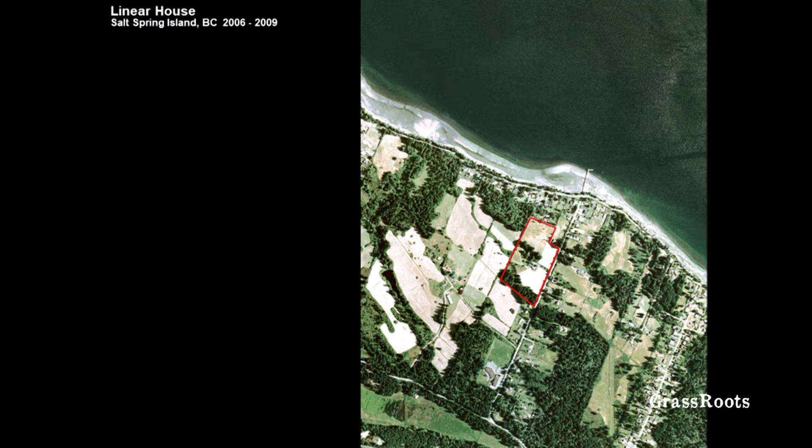And this project is located on what is called a farm. It's really not a farm. It's just a large property that has some hay growing on it, so it can qualify for some tax benefits. But it's on a farm. And this is the situation of the property before we began.

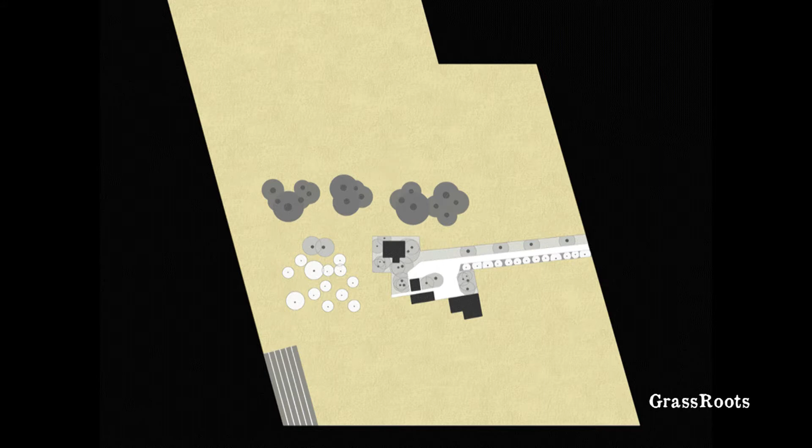And we had a house, and there's a studio, and a utility building, and a barn. And then an existing row of mature Douglas fir trees, and then a cultural landscape of fruit trees. This farm was established by some German immigrants who lived there for many years, and our clients purchased it when they retired.

And so the first thing that we did was we decided to remove the house, the small structure, and what we actually did was sold it to some neighbors who moved it and simply relocated it down the road. And then within that, we inserted a linear house. We call this the linear house, and it's called the linear house for good reason, because it's 300 feet long and 16 feet wide. Anything that's long has a huge advantage proportionally. There's lots and lots of things that develop as a consequence of that.

And so here you see that this long, 300-foot long bar of building has a division in the middle, which is a breezeway, which divides it into a principal house and a guest house. And then the cultural landscape was reinforced with trees and vegetables, because the people who bought the property, our clients, were phenomenal chefs and very, very interested in food. In fact, they have 4 different types of ovens in their kitchen so that they can do all the things that they want to do. And so that is the strategy for the house.

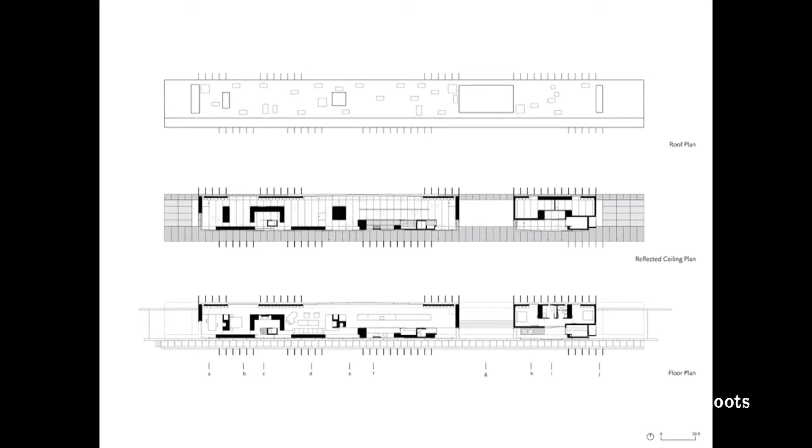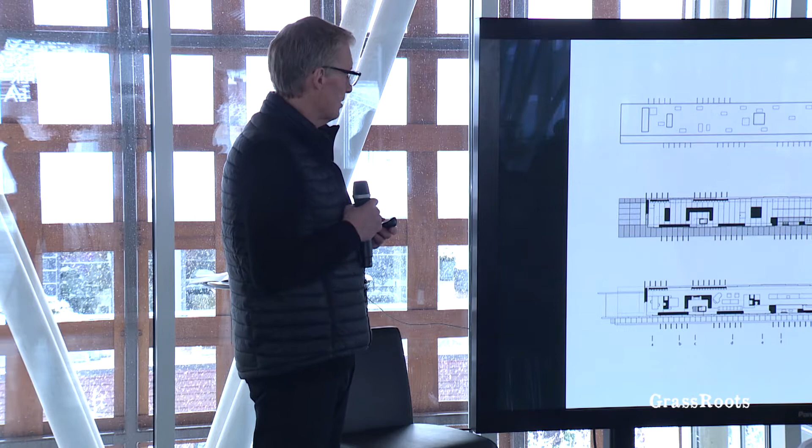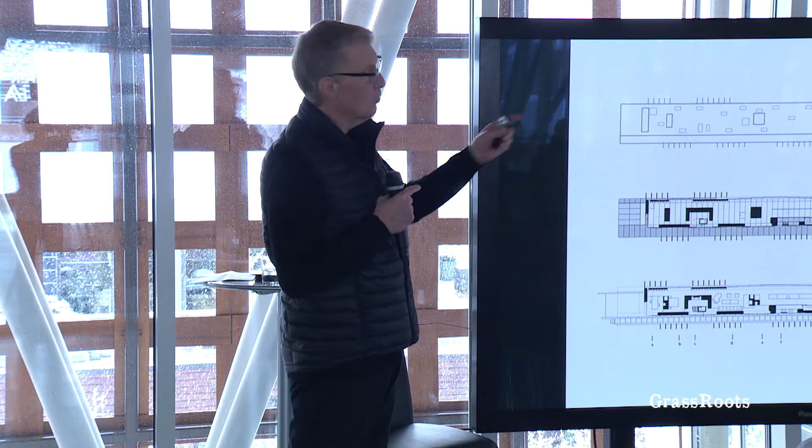And so this is the floor plan of the house, and you can see it's really just a line of rooms, one on the other, connected by a walkway which runs along the south side of the house. And maybe one of the most unusual things, aside from the fact that the rooms are 16 feet wide and the house is 300 feet long, is that we have over 40 skylights in the roof of the house, but I think there are only 4 that shine into the interior of the house. The remaining 36 skylights shine into the roof assembly, and I'll explain what that does in a moment.

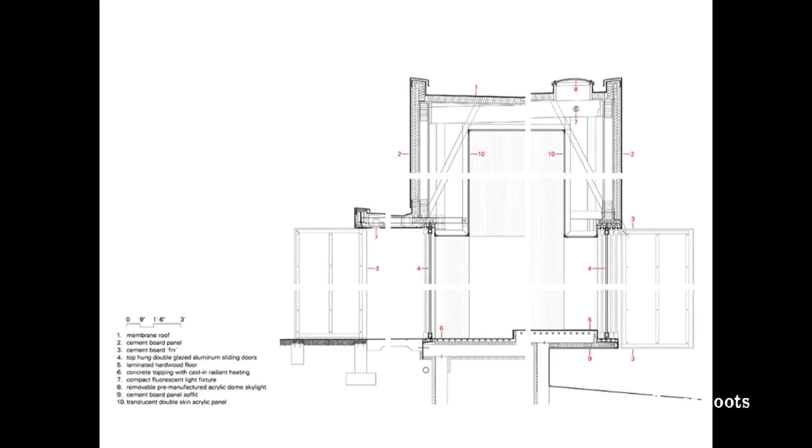And so here is a building section, and for those of you who can read architectural drawings, what you can see is there is an interior envelope and a structure and a skylight that doesn't project through, and this is representative of those skylights that are not shining into the interior. They're shining into the building envelope. And what that does is it allows us, because the interior surface of the building is translucent plastic. So when you see the images, you might think that this is a white painted drywall interior. It's not. It's an extruded plastic sheet which allows the light from all these skylights to shine into the house, and then at night those lights are replaced by artificial illumination in the same spot.

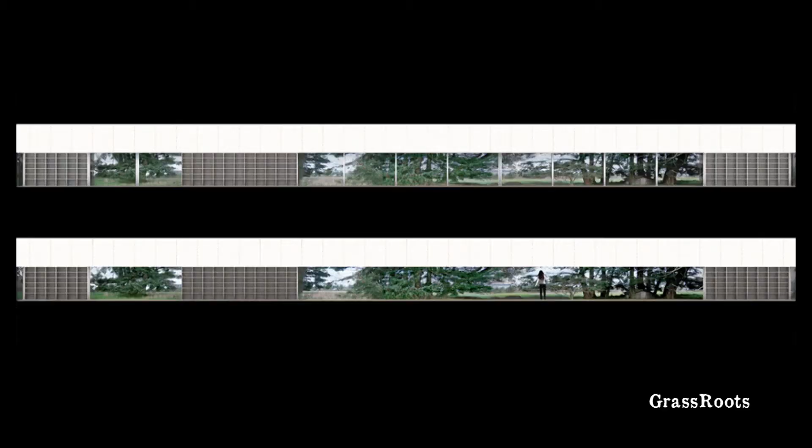Further, the long length of the house has retractable walls, like these walls in the gallery here. We have an 80-foot long wall which retracts fully, so the upper drawing shows the glazing units, and the lower ones show it open, and on top of that, it's a wood structure. And so the 80-foot span is a wood span, which is made using a composite structure of plywood and glulam beams. And so here you get the result of that.

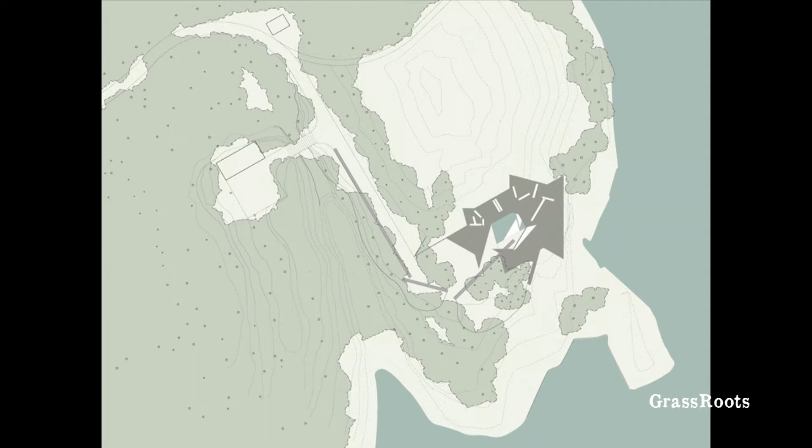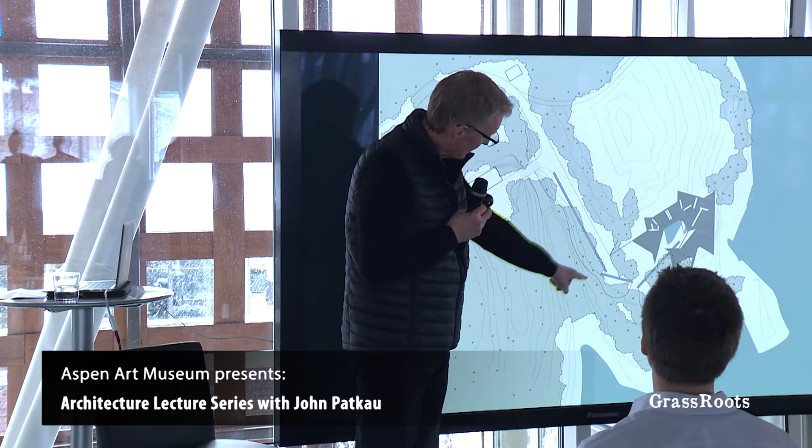And it's a very complex site. We call the house the 5-site house because there are so many different characteristics. There's the Douglas fir forest mixed with big leaf maples, which go a beautiful luminous yellow in the fall. There's a tidal basin on the south of the house. There's the open water, which is quite violent, has significant storms to the east.

There's a really bare mound of rock, as well as the last landscape, which is the beach below the house, which is subject to these tremendous storms, and so there are logs and all sorts of flotsam and jetsam that have been deposited on there in a very sort of changing and dynamic pattern. So obviously you have the great view and you take advantage of that. But for us, the beach below was in some ways the inspiration for the house. And we decided to make the plan form of the building complex in its geometry, as a reflection of this beach.

And so the house begins with the site, with some stone walls which we constructed to protect the approach to the house from a very steeply sloping cliff-like condition. Then we introduced reinforced concrete walls which start to define the primary space. And then all the secondary spaces that sort of are the eddies around the flow of that primary space are developed into bedrooms and kitchen and service rooms.

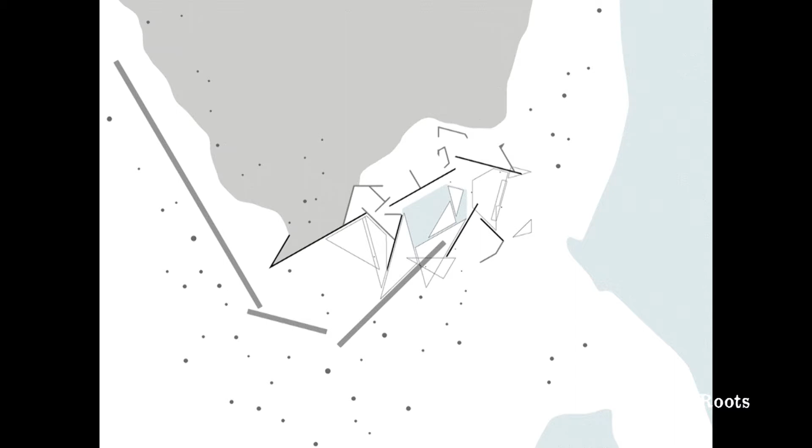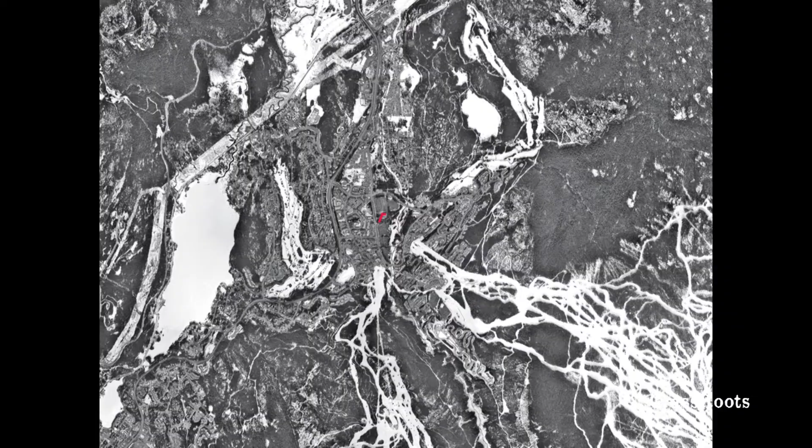So there is a huge diversity of art that all comes from British Columbia, which is what this museum is dedicated to. The parts of Michael's collection which are not from British Columbia are not in this gallery. It's strictly his British Columbia collection. When he was looking for the site, he wanted a site which had trees. He said it was really important to him, and I'm really pleased that he had that point of view, because he ultimately settled on this site in Whistler, and you can see the ski slopes coming down to the Whistler Village, and his site is just off of the Whistler Village, which you see here.

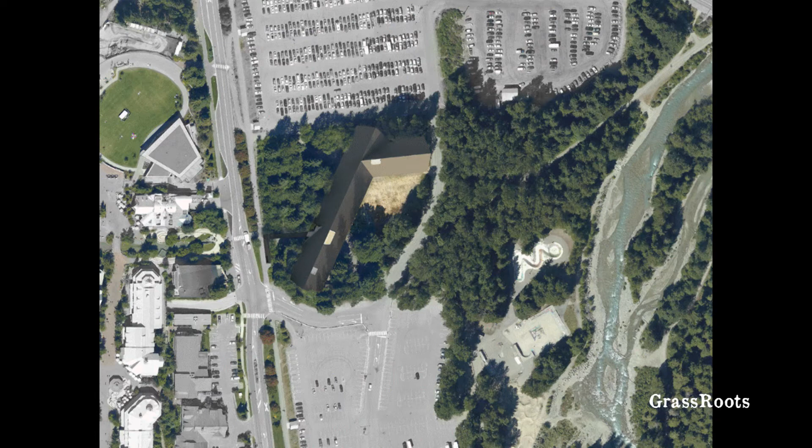The site was donated by the municipality of Whistler. It was a former municipal works yard. If they were hauling a car away, they would store it on this site. If they were storing a pile of gravel or equipment or various things, this site was the catch-all for everything the municipality was doing. Fortunately, they were doing this all on the ground plane, and they left the trees on that site in place. And so when Michael saw the site, he chose it among the sites he was considering because of those trees.

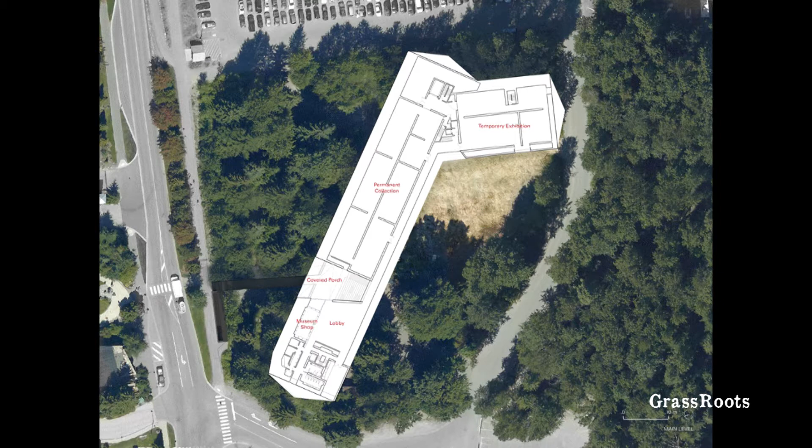And I think that was both an important personal decision and a very important decision for the art on exhibit, the permanent collection, because the art from British Columbia has a long tradition of being tied to landscape. We have all the First Nations art, but also artists like Emily Carr and E.J. Hughes and many artists until the present day who have been focused on the landscape. Putting the building within the landscape was central to our concept, which was to open the building to the landscape. The curators insisted there would be no natural light within the galleries because it was a permanent collection for the long term, and they didn't want to deal with the impact of ultraviolet.

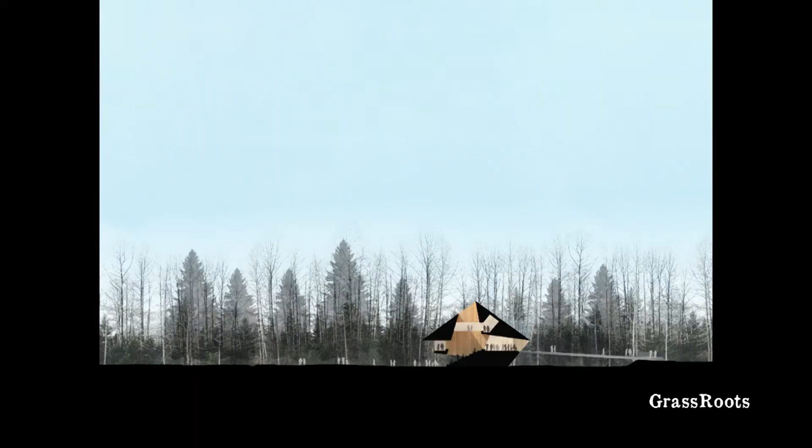And so the building is organized into lobby, entry, porch, permanent collection, and then temporary exhibition at the far end. The temporary exhibitions obviously are very diverse in their character. But what this allowed us to do was to organize the building so that when visiting the permanent collection, even though we didn't have any connection to natural view and light within the gallery space, it was very easy to step out into the principal circulation system of the building, to be in contact with the forest and meadow that we created on the site.

And so here you see the building in cross-section. You approach the building from a high point on a bridge, and the building is located in a floodplain. We were required to elevate the building above the 1 in 2,500 year flood, which I guess is playing it safe, and have very little on the ground. So we just have a few piers that come down, I think about every 70 feet. There's a touchdown point, and it's really a bridge that we've constructed for the museum above.

This is really a dike which protects Whistler Village from the floods, and so we're building out beyond the protected area into the floodplain because that's where the trees were. Further, because of the enormous amounts of snow that Whistler gets, about 15 feet of accumulated snow over the winter, the roof is very strongly pitched to shed that snow. And so here you see the building in cross-section.

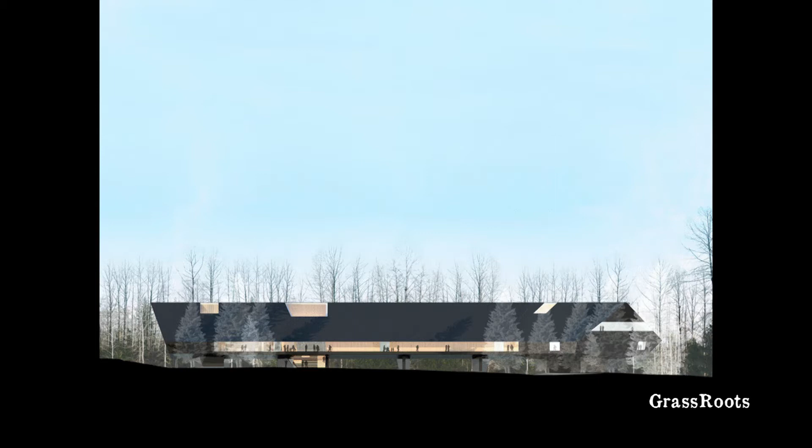And so here you see a view from the meadow. The museum is a dark color for exactly the same reason that the houses were a dark color, so that from the village it disappears. When you're looking at the museum, all you see is the trees that surround the museum, with the exception of a few moments. And one of those moments is the walkway that connects all of the spaces on the main level, which you see, which is wood-clad.

And then the other is the entrance. And here you see at the end of the bridge that the entrance portal, which is an outdoor porch, which allows you to walk through the building and then down to the meadow beyond, as well as entering the building, is also a wood-clad space.

And so here now you're leaving Whistler Village proper, you're crossing the bridge which rises to the museum. The aperture for the entrance to the museum, as well as the connection down to the ground plane below, is lined with hemlock, which is a common species in this region. And then from below, there is a large amphitheater-like stair which connects you from the porch down and from the ground plane below up to the entrance of the building.

And so here you can see that areas that are protected as well as visible are clad with wood, whereas the remaining part of the building is clad with this dark material so that it basically disappears. And here you can see how the building is literally spanning across the site to allow the flood to race through the site whenever that 1 in 2,500 year event occurs.

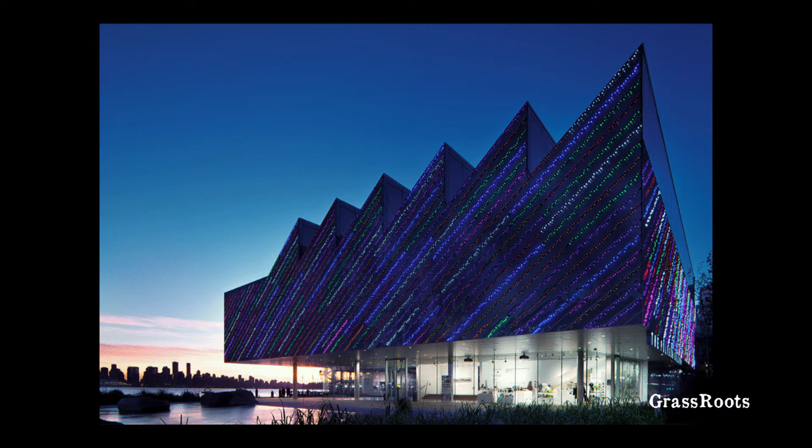And this last holiday season, an artist was commissioned to light the building. And so what you see here are simple Christmas tree lights, but because the background of the wall is a mirrored stainless steel panel, everything gets multiplied many times, and so it really takes on a tremendously animated character.

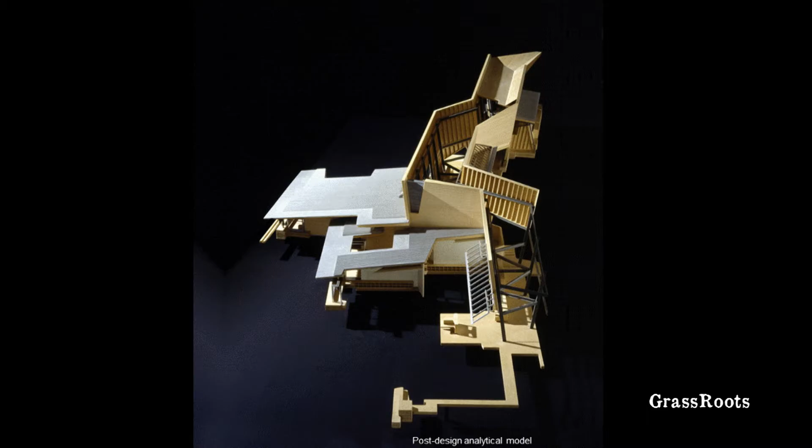Okay, so the other half, research projects, and this is really something quite different. This is a building from the mid-90s, a school, and this is a model that we made of that school, which is a fragmentary model. We have always done research, and in the old days, it used to be this kind of formal research. Architects all do research, obviously, because we're designing things, but we always did other kinds of research as well. And so this was part of a large body of work that we did of sculptural models.

But about a decade ago, we decided to change course, and this is the book that Rich mentioned, Material Operations. We decided that we would focus on a very direct idea of taking different materials and applying a force to those materials and deforming the material in some way that would turn it into a structural material and a spatial material. And so it began, and there's a number of projects since this, but you can see that there are about a dozen projects here.

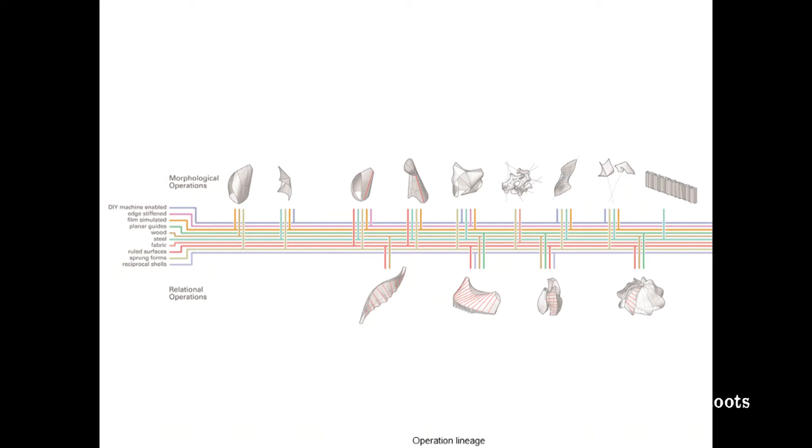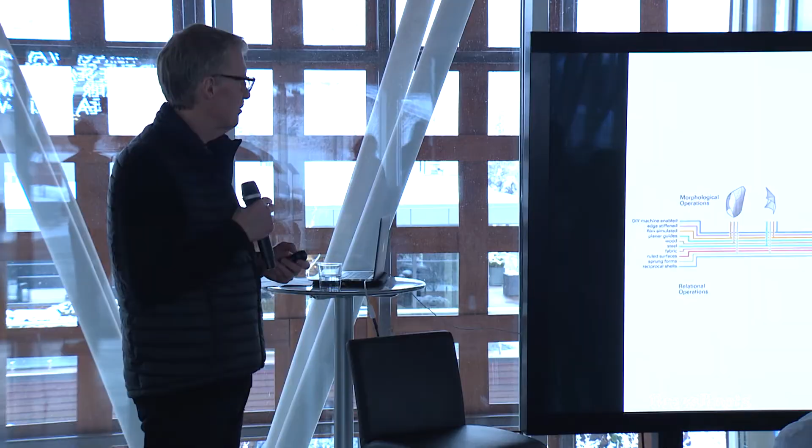They take form of, there are wood projects, there are steel projects, there are fabric projects, all sorts of projects which take on different kinds of character. And it began with this project, which is called the Skating Shelters, which was a temporary installation on a frozen river in my hometown of Winnipeg.

And we were invited to construct some temporary structures to protect... it gets to be 40 below for significant periods of time here. And when you're skating on the river at 40 below, it's nice to get out of the wind once in a while. Winnipeg is considered to be the windiest place in Canada.

And so what we did was we began to try and understand what we would do to construct these temporary shelters on the river. They had to be very light, they had to be materially efficient. And so we looked at a few things. We took a sheet of plastic and we put an elastic band around it, and just the force that the elastic band puts on the sheet of plastic curves it, and as a consequence of being curved, it stands by itself and it protects you. It has an interior.

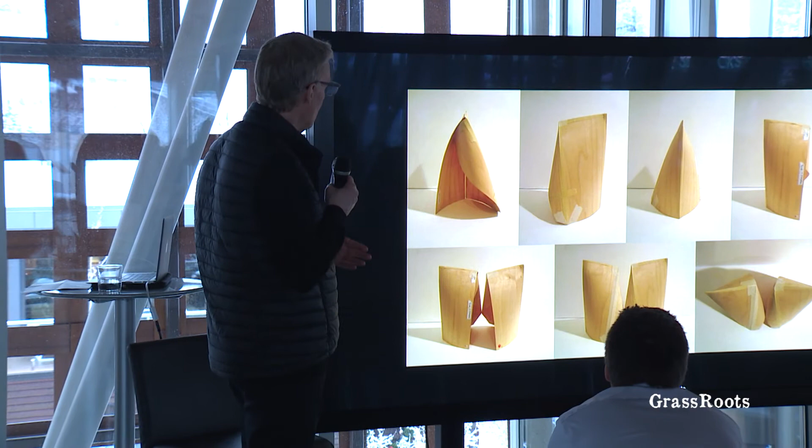Well, we then went and bought some thin plywood. We've got a big workshop in our office. We do lots of making. And we tried to make that thing out of the thin plywood, and it didn't work. We were shocked. We thought the wood veneer would be the clue, and we realized after the fact that wood veneer is fundamentally different than plywood.

Plywood is what's called an isotropic material, in the sense that it has plies going in both directions. It behaves in a similar way whether you bend it one way or the other. It resists bending in both directions. Veneer is anisotropic. Wood has a grain and it has an orientation. And in one direction it's very strong, and the other direction is quite flexible. And so the veneer was behaving in a way that was quite different than the plywood.

And so we were stumped. The plywood was not going to get us where we needed to go. Not only that, we couldn't get sheets big enough that you could actually get into. And so we looked around and we found a material called bendy ply. And bendy ply is a 3-ply thin sheet of wood which has a thin central veneer and 2 plies of heavier veneer, which are both in the same direction. And so it's very strong in one direction and very flexible in the other direction.

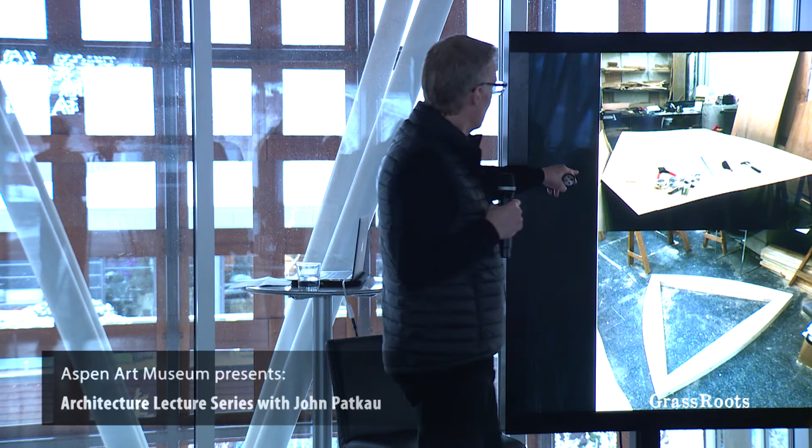And we then layered these sheets of bendy ply one on the other to aggregate a bigger sheet. And so here you can see 3 sheets of bendy ply that have been attached to one another, and the beginning idea of a platform and a spine. And here we go making it in our shop. And you can see that the bendy ply is very, very similar to the wood veneer because it is anisotropic, not isotropic. And so there were some surprises.

So when we really, really cranked, the bendy ply would break. And so we cut a slot and an eye out of it to relieve the strain at that point. And at the point where these 2 sheets came together, they actually collapsed on one another. So we simply, in our modeling, we took a scissor and just cut it off. And here we just cut it off, and it springs into this natural sort of ellipsis.

And what this is, and this is really an important concept, this is what I would call a sprung form. The curvature of the material is not something that we impose. The curvature of the material is the shape the material adopts as a consequence of what we're doing to it, and in this case, attaching it to a platform. And so here you see the interior. Where there's only a single layer of bendy ply, we perforated the surface to bring more animation into the interior. And you can see even where we go to these different layers, the base acknowledges that difference.

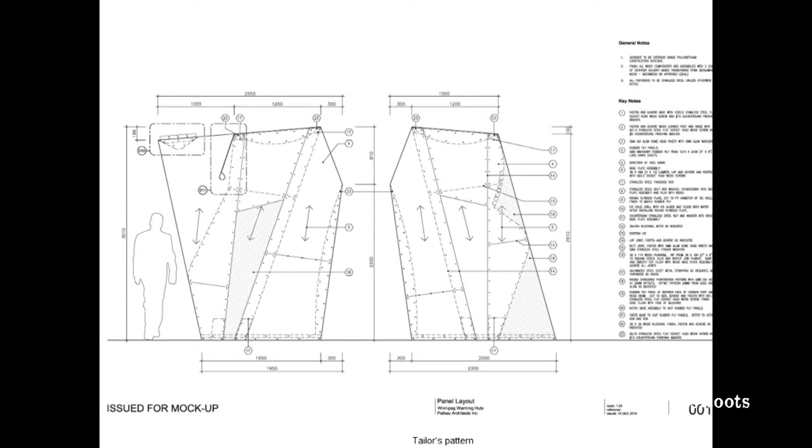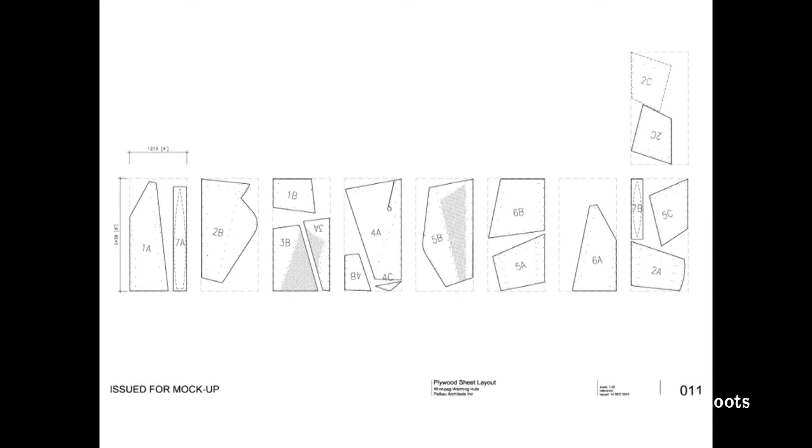We just made patterns for all of the components, and we sent those patterns to Winnipeg, which is 2,000 miles away from Vancouver, and they made the things out of the patterns there. And at the same time, we started working back in model form with the wood veneer to understand how the different pieces would relate to one another, because we had a modest budget, but it allowed us to make 6 of these things. And so we worked hard to find the arrangement for the 6, which you see here.

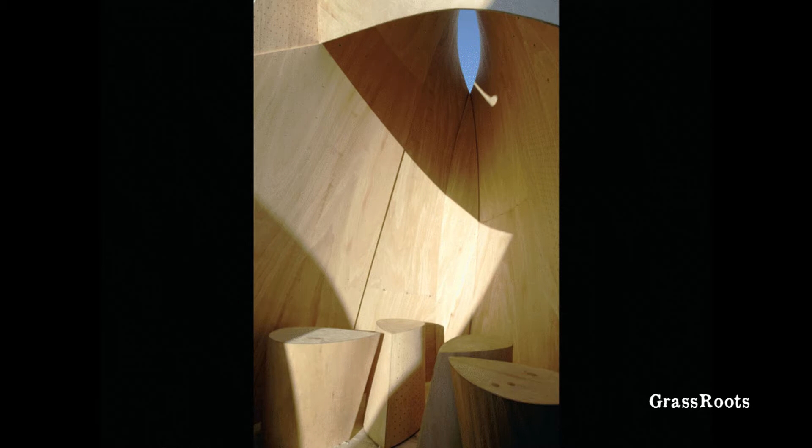And so intrepid souls in Winnipeg at 30 below zero, skating along the river. There weren't many, I got to tell you. And here you see these forms, which are simply the curvature and shape that comes out of restraining the base and fixing the joint. And all of these forms just spring naturally. There is nothing predetermined about these shapes. They're entirely the will of the material. And then this is the interior. Even the benches that we made for people to sit on, the little stools, are made in the same way.

So while that project was underway, I was teaching a studio at Yale University, and the notion was that we would build a workspace for young people who were not particularly gifted academically, but had great sort of hand skills. We would make a workshop for those people, really talented maker people. And we went to the Eli Whitney Museum and Workshop in Hamden, Connecticut, which was the theoretical site of our studio.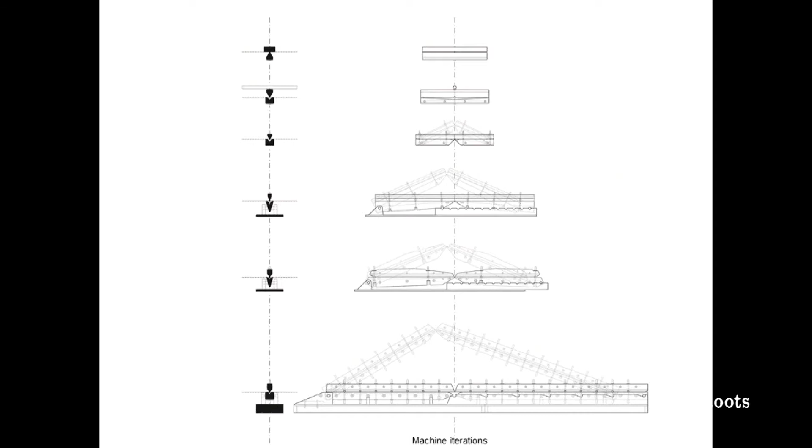And we began to invent a machine, and we ultimately made 6 machines, and this took us 4 months over the summer. We started with the top machine, and we ended up with the bottom machine, and they are incrementally bigger and more refined and more powerful. They're basically wood and steel constructions which are designed to break a piece of steel, to fold a piece of steel like a press brake would do in a steel shop, but also to bend it across the fold at the same time, which is impossible.

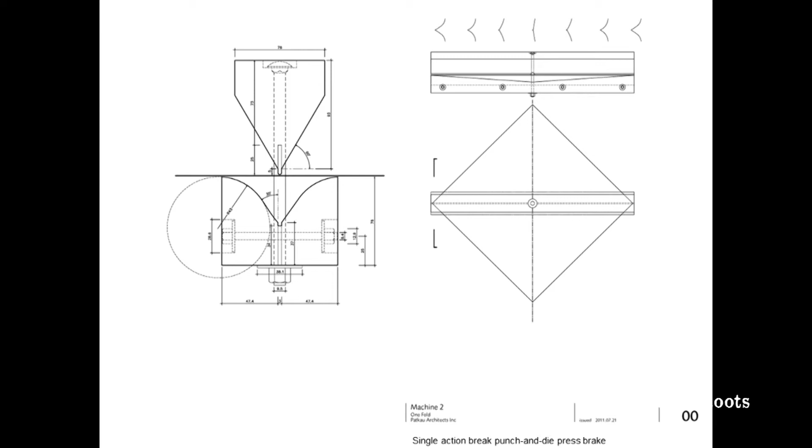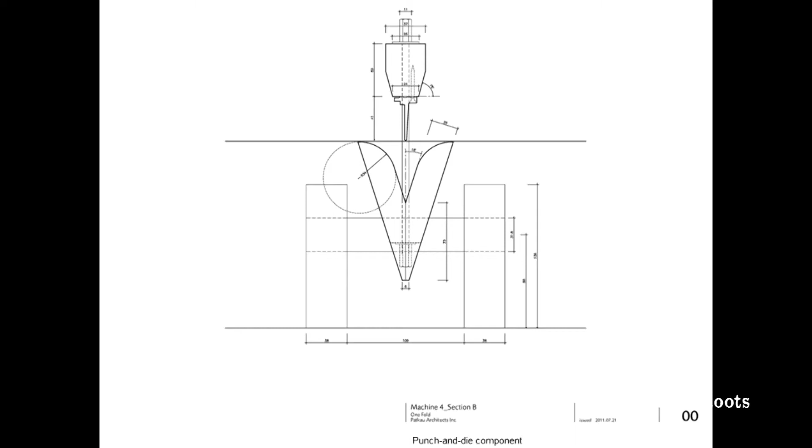And so this is what the machine started out looking like, and we made a crease in one side and tried to force the steel to do that, and we got some success, but not much. We began to figure out different ways of doing it, and we quickly came to the notion that the brake had to have a joint in the middle, and the joint in the middle would allow us to bend it. And what we learned was, if you bend it and fold it simultaneously, not sequentially, you can make it go both ways. And so, using thicker and bigger sheets with bigger and bigger machines, we finally got to number 5.

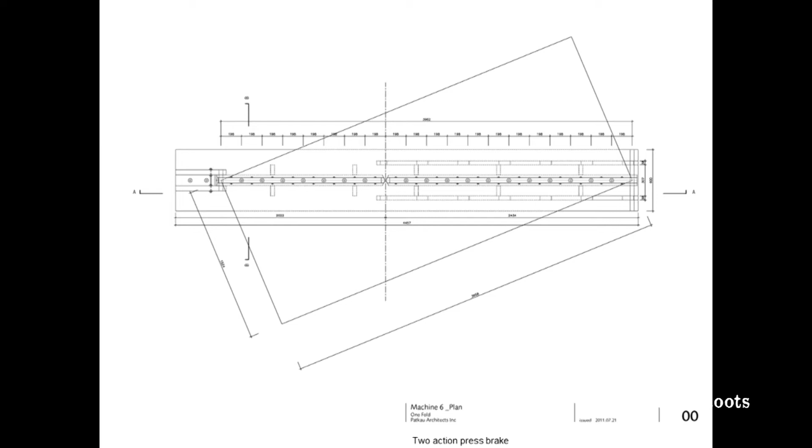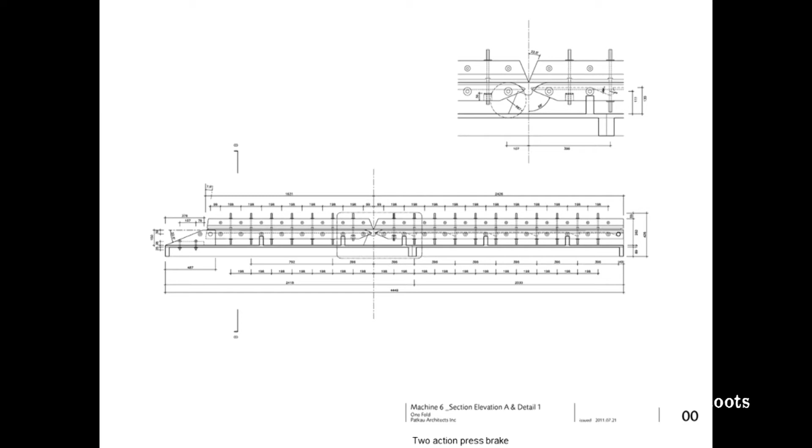Now number 6: this is the largest sheet of stainless steel we can get in Vancouver, which is 5 feet by 12 feet in dimension. And we made a machine that was big enough to break that piece. In order to put the force in, there are bolts that run along the entire length. So we drill holes on the diagonal of the sheet, put the sheet into the machine, and then start cranking the bolts together to force the machine to fold the steel. At the same time, we lift the machine in the middle to cause the form to bend.

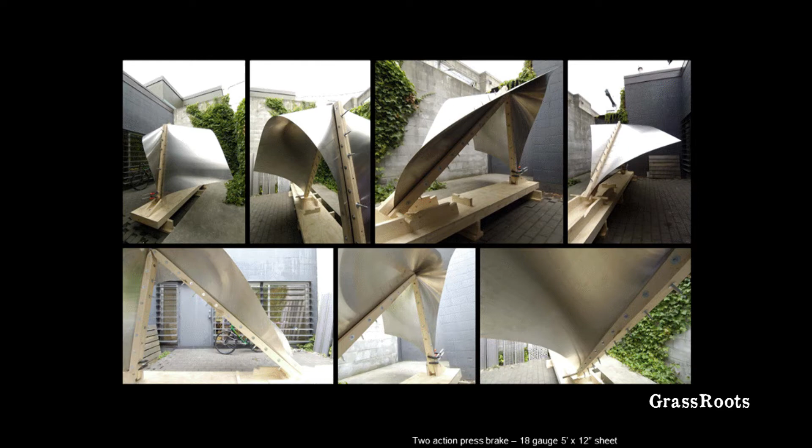And so here you see our courtyard. You can see the machine getting set up, starting over here and following down. You can see the sheet of steel being brought in. The machine is put together. We start cranking it. We start hoisting it. And here you can see, again, the machine and then the final product at the end. This is the sheet of steel still in the machine. And this is the sheet of steel in our courtyard.

And this is really interesting because it is a very robust structure, because the fold is inherently very strong and the arches are very strong. And those arches are extremely beautiful curves because they're not geometric. They're completely natural, sinuous curves that come out of the forces. It's just the resolution of forces moving their way to the edge of the sheet, which results in this shape.

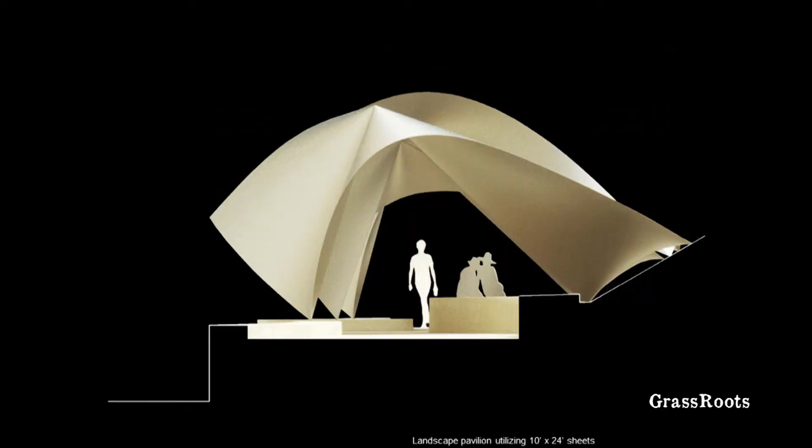And so this is a project which we're trying to convince somebody to build. It's only twice as big as what we made in our courtyard, and it forms this landscape element. While we were doing that, we got a call from Comme des Garçons in Tokyo.

5 minutes? No, it's going to be 15 minutes. Sorry. I'm going to buck the system here.

So we got a call from Rei Kawakubo, who is the designer from Comme des Garçons. She said she saw our skating shelters. She loved the skating shelters. She's doing a new shop in Ginza. She wants to have something that we would make for her in the Ginza shop, except it can't be combustible. It has to be non-combustible. We said, no worries, because we're working with stainless steel.

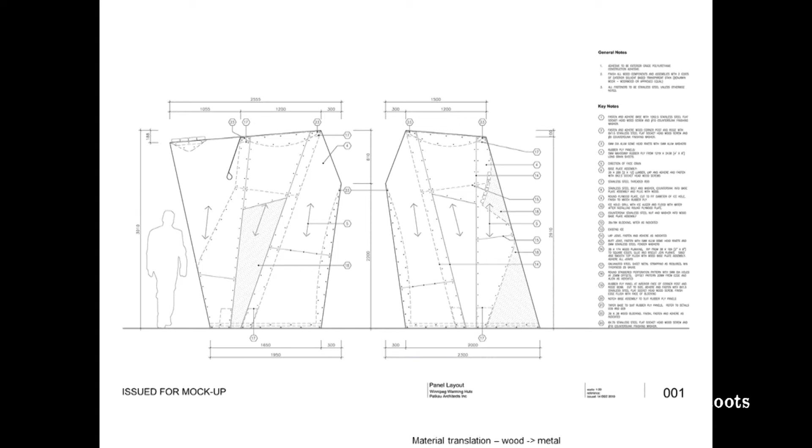And so we went back and we designed this version of stainless steel like the skating shelters. And we took all the lessons of the skating shelters in terms of patterns. And so we made this model out of plastic, it's only this big. Then we took it apart and we measured it. And these are the pieces that you can make that out of.

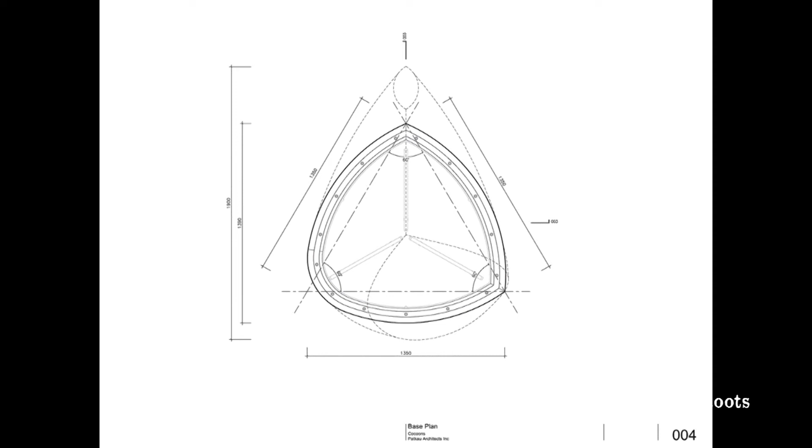And these are the folds. So these straight lines are where you fold it. And you can fold them and then join the folds, which is different than the way you would do it with the wood, because this is steel. And so this is the language of the parts, and I'm speeding up to try and meet my deadline. So here it's being fabricated in Vancouver.

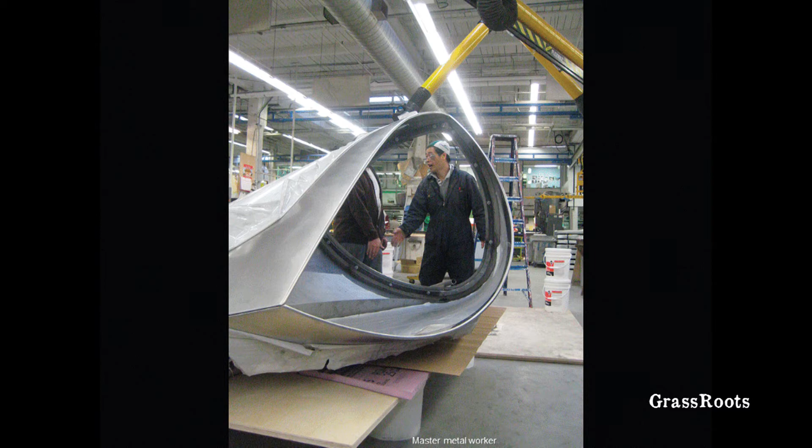Now, we have to build them in Vancouver. We have to crate them. We have to ship them to Japan. They can't use the elevator in the shop, which is on the 2nd floor, because it's somehow not allowed in their lease, and it's too big to go up the stair. We have to design it so you can break it down. So they unpacked it on the street in Ginza, broke it into pieces, took the pieces up and reassembled them.

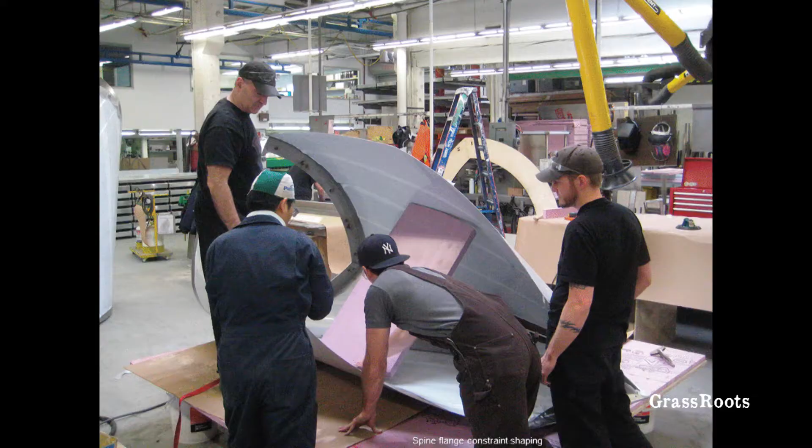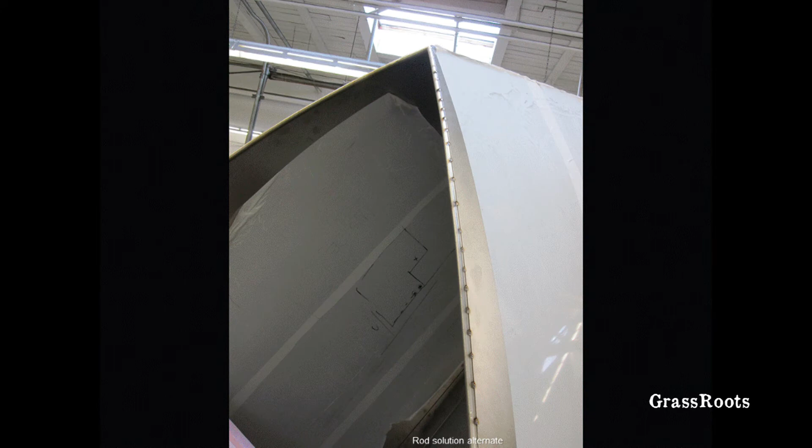So here we are making them in this stainless steel shop, the 2 of them. Interesting problems, which we never understood. We wanted to stiffen the edge, and the edge is quite sharp because it's a very thin sheet of steel. And so we couldn't use the plate that we had imagined, but we found that a rod could be easily attached to that edge because it travels on the circumference, and it gives you a very beautiful edge condition.

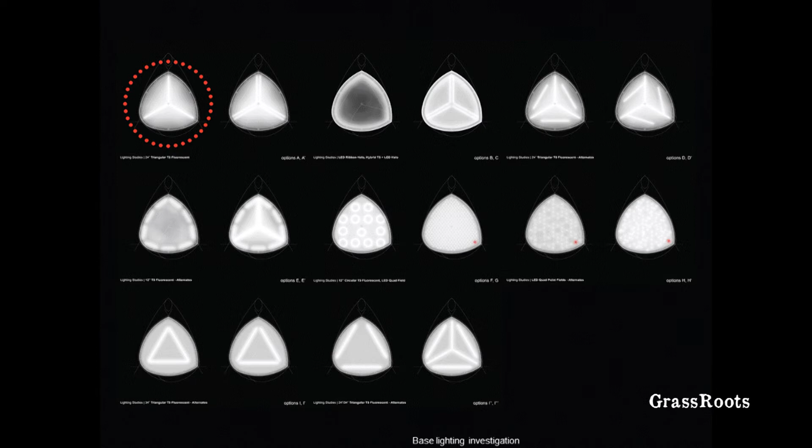We also had to invent a door because one was a change room, and so we built a version of it in wood in our shop and played with the door, and here it is. It's a fabric door with the light from inside, and the light inside is a luminous floor which has 3 fluorescent lights below it. And this is the final, we call them cocoons, shot through the aperture at the top, looking back down.

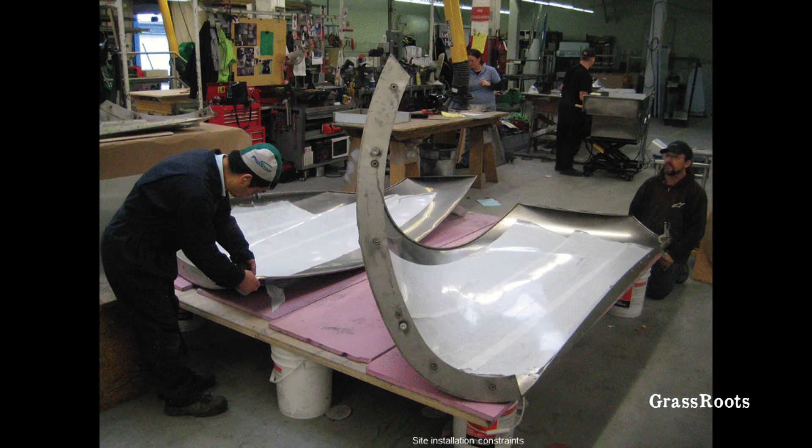And here you can see the pieces being disassembled and then reassembled, as they will be in Tokyo. The floor going in, and here is the final work in the shop floor in Vancouver, and here it is in Ginza.

So my mind never stops. So I was thinking, I really want to make ways to get these things to be really big. I want to make them big, but these are all working on sheets and bending sheets. And when you start wanting to be big, you can't get sheets that big. And so I came up with the idea, I noticed in the previous cocoon project that there was one point along the curving surface where you could put a straight edge, what we call a ruled surface.

And so here, I came up with the idea of developing a truss which would support curving guide rails onto which you'd put 2x6s. And those 2x6s would be moving slightly in relationship to one another so that then you could shotcrete the sides.

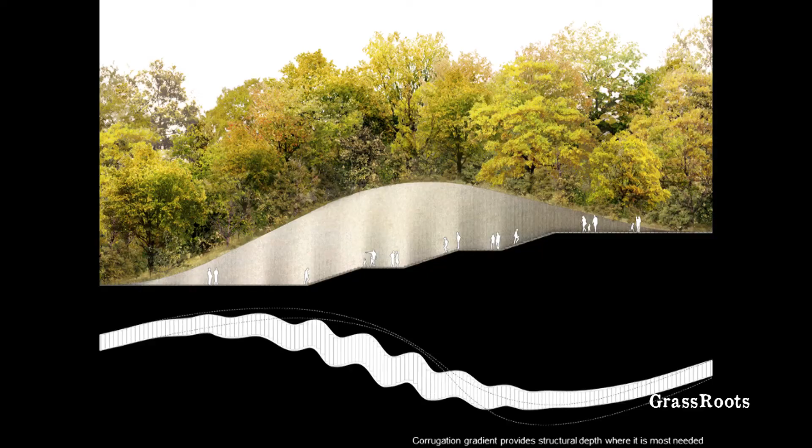And so here is the notion. It's a theoretical project. You're trying to get through some steep grade. You cut a slot in the grade. You construct a reinforced concrete retaining wall, which has a big amplitude curve at the top and small amplitude curves at the bottom to act like corrugations to increase the structural capacity of the form as the load increases at the bottom of the retaining wall.

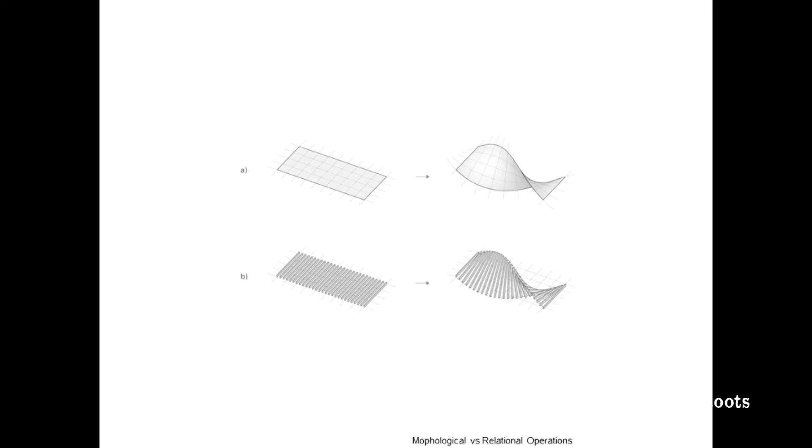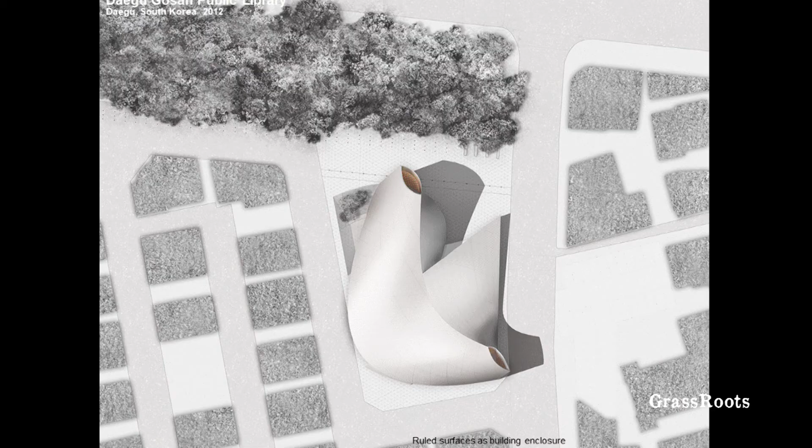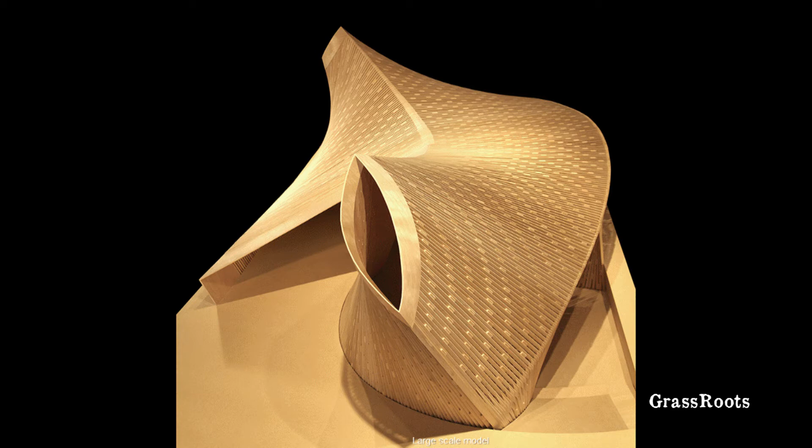And so here you see the outcome of that. You see that all these little tiny pieces of wood are tied together, form this large, really beautiful undulating surface, which has remarkable structural properties.

And so, I don't know why this is doing this, but it's really not behaving. It's not behaving at all. Uh-oh.

So what's happening is that all the pieces of wood are tied together, and then there's a skin, a shotcrete skin, which is put on them to act as a diaphragm.

And then, oh yeah, keep on, that's great. Keep on going. Further. Oh, great, great, great. No, keep going, keep going. Here we are, right here. Perfect.

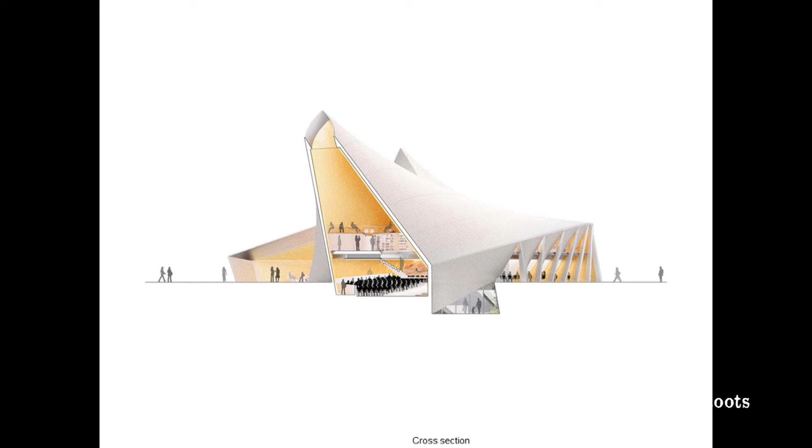So here are those forms that come out of simply putting 14-foot pieces of timber together. It's very much like a woven basket. And you can see that all the pieces are straight. So when you do a building section through on one axis, all of the cuts are vertical. And when you do a building section in the opposite direction, all of the cuts are curvilinear.

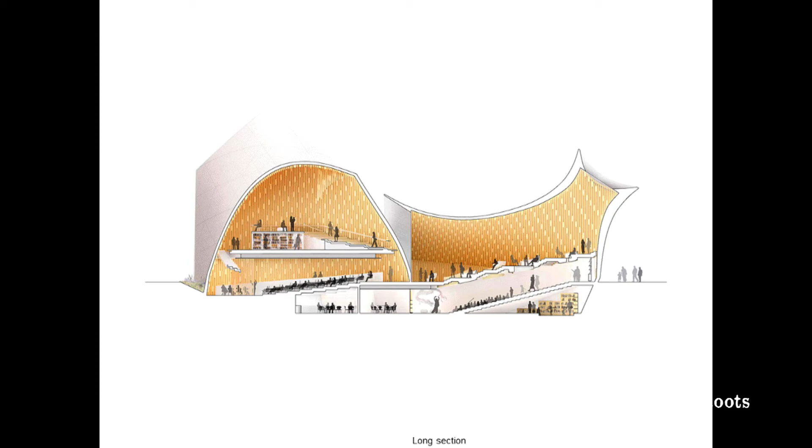So you get these phenomenal curving volumes simply by the incremental adjustment of one piece of wood relative to another piece of wood and the resulting space. Okay, one quick project and then the Temple of Light and we're done.

So this is my next career as a sculptor. This is called cut drawn. The notion is that you take sheets of steel plate and you cut with a laser slots in them in a certain pattern, and that pattern is a refined pattern that comes after making hundreds of these things. We begin in plastic, then we move to light gauge metal, and then we go to heavy plate. And we've worked up to 3/8 thick plate with this stuff.

We broke the biggest crane in the steel shop in Vancouver when we were doing one of these, because the forces were in excess of 20,000 pounds of tensile force when we pull these things. Because, I mean, you're pulling through a solid sheet of steel. It's just an unbelievable thing.

But in Blaine, Washington, which is just over the border, not far from us, they test chain for the US Navy in a pit. And they put it in a pit because if it ever fails, the repercussions are unbelievable. And so my ambition is to pull something in that pit. So here is the video.

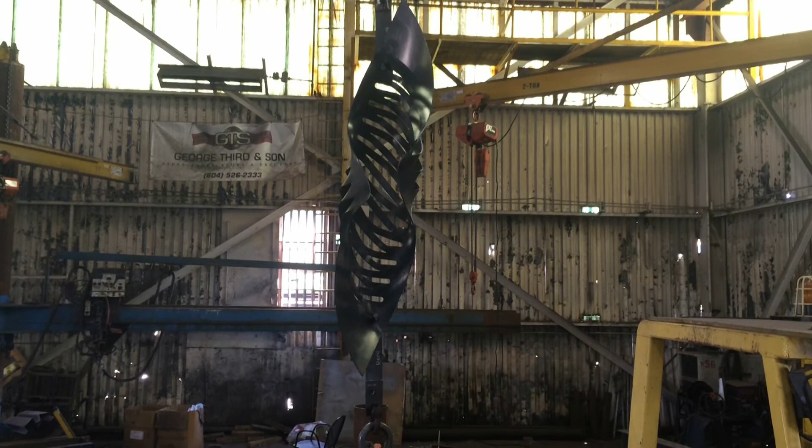Well, it's good. In 30 seconds, it goes from that to this. And so I've got many of these things now, and in fact, I've been cut off because I have no more room to store them. The office is full of them. Everyone's desk has one of these on it.

This one is about 10 feet long. I call these the mediums, and I have one large that is leaning against the wall in the studio, but I'm planning to go to Blaine to do extra large.

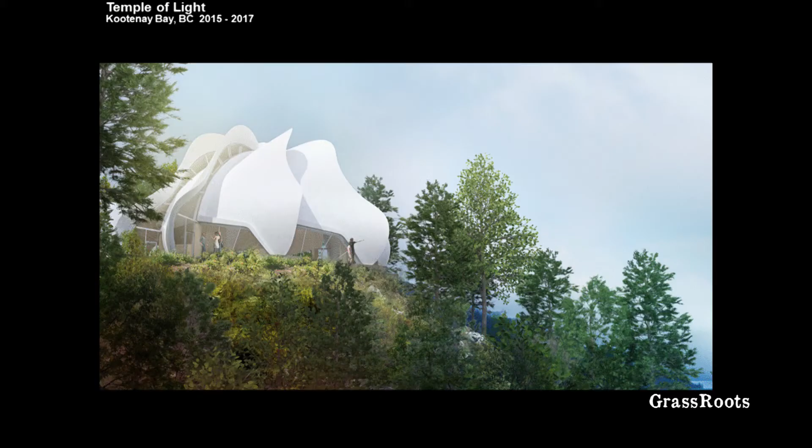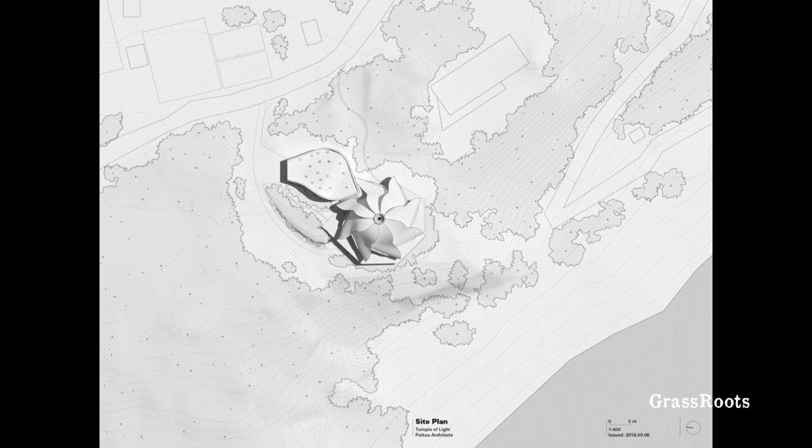There are certain principles which we had to abide by. One is it had to have 8 faces, because part of their doctrine is that all religions of the world are welcome, and they recognize that there are 8 religions. The other groups have 9, but they have 8. And we had to use the existing foundation of the building, and so we have 8 bearing points, which are the 8 foundation points of the former building, and then we constructed a new auxiliary building.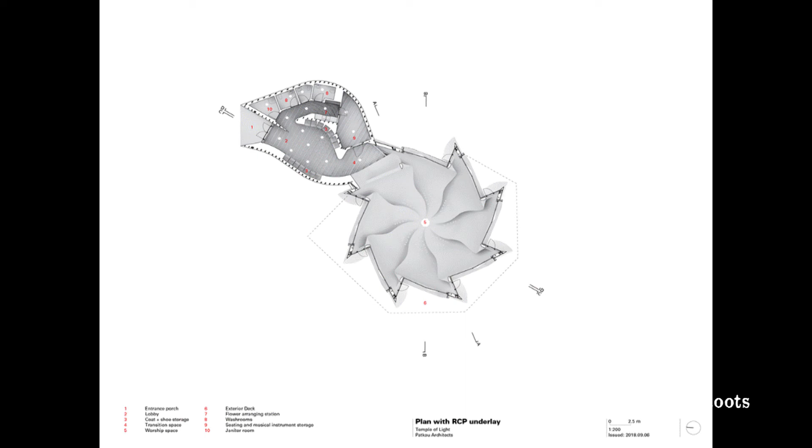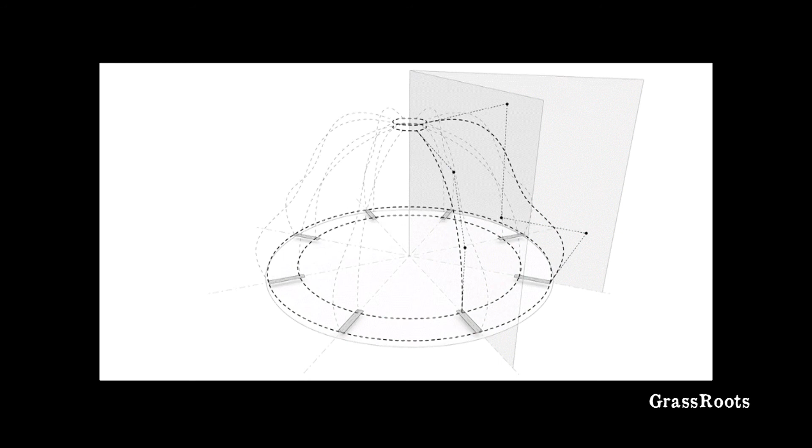And again, moving through it, you can see that this form has those 8 bearing points and is a rotational structure. It is based on a very simple idea. The building section doesn't look simple, but it is simple. The idea is that you have a truss. You have 8 trusses. They spring from here to a ring beam in the middle, and they have a simple curve on the inside and a complex curve on the outside.

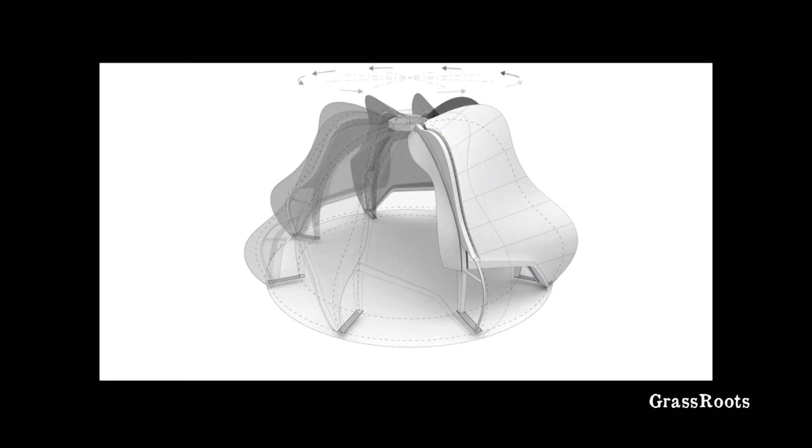Originally, that was a steel truss with glazing. For budget reasons, because it's a low-budget project, we ultimately had to build it as a stud frame wall in large part. Oh, no. Okay, we're missing one. So this is the idea that you simply attach a straight piece of wood from the bottom to the top of the adjacent one, and they then form this undulating surface, and then we cut the bottom out.

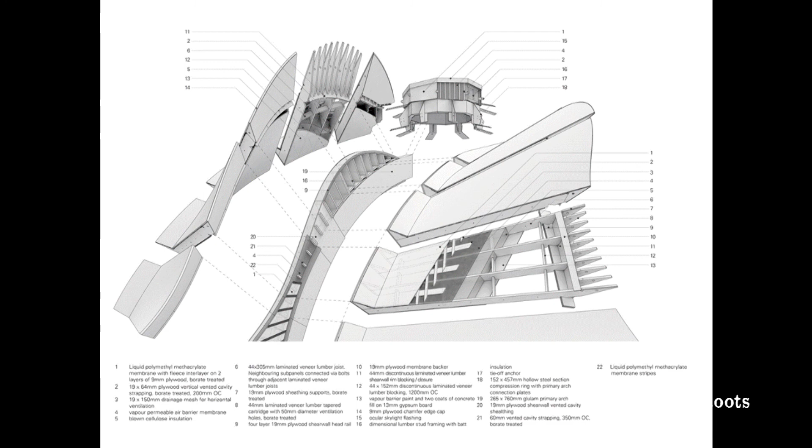And we were able to build this because of Spearhead, the same people who built this roof. Spearhead happened to be in Nelson, British Columbia, which is across the lake from the temple. The temple is a very sophisticated, high-performance building envelope. It's triple glazing, very high insulation levels. We have photovoltaic as well as geothermal to energize the project. So the ashram is very committed to sustainability.

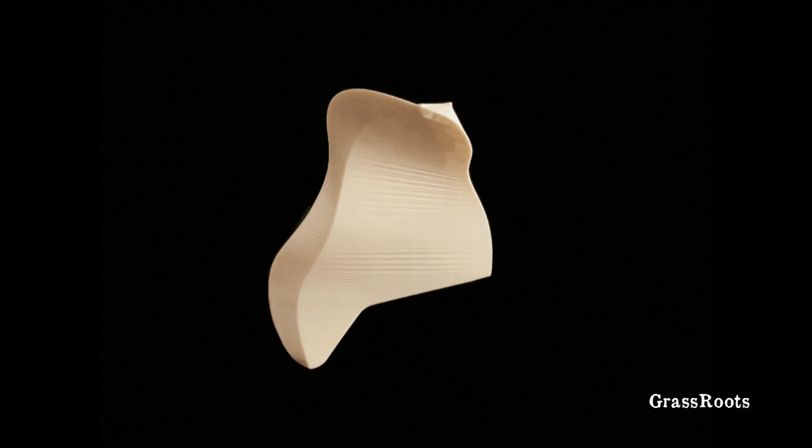And here you see one of the 8 petals. This is just a poor digital print, but you can see all these straight lines. That is a reflection of the fact that these curves are actually simply aggregated straight lines. And this is a shop drawing from Spearhead's office.

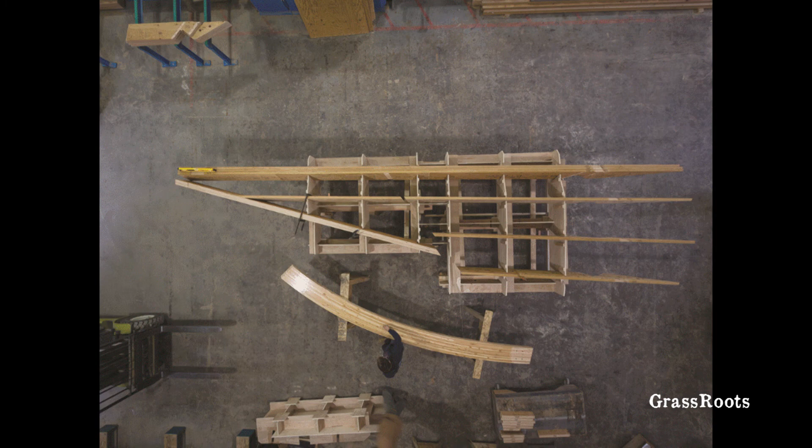So here, there's a whole bunch of these, but this is this thing. I'm gonna work over here. I'll see. Good, just keep going, run right through them.

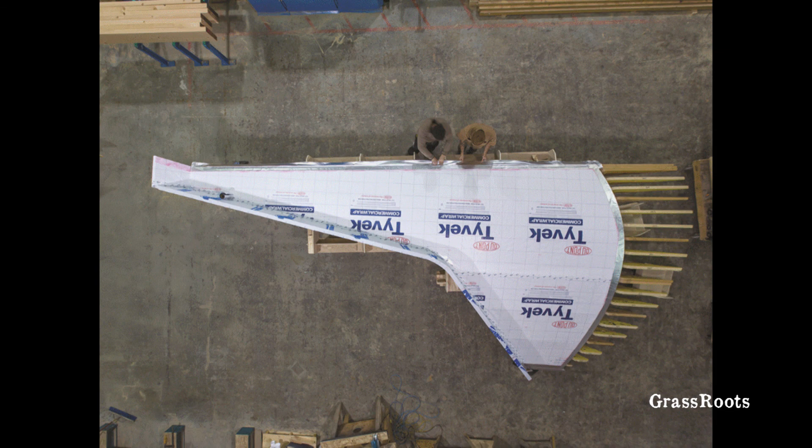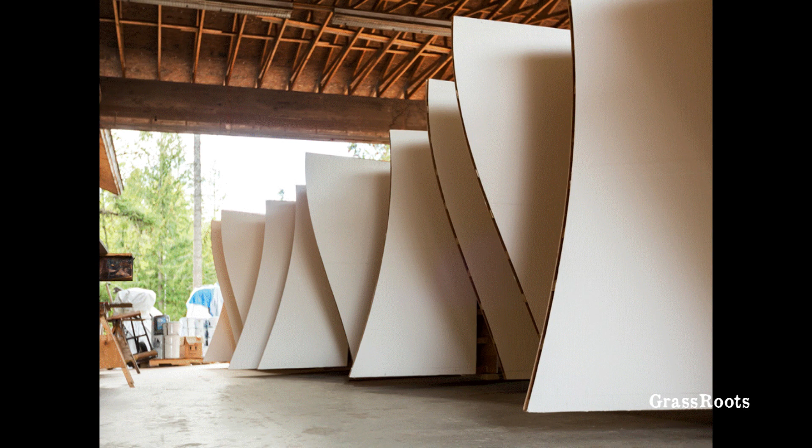So this is just one piece. This is 1/4 of one of the 8 petals being put together in their shop. Keep going. Here are some other pieces. The pieces are all coated with a liquid applied roof membrane. Moved across the lake to the ashram, which you can see here, and the arches have the simple inside shape and the complex outside shape.

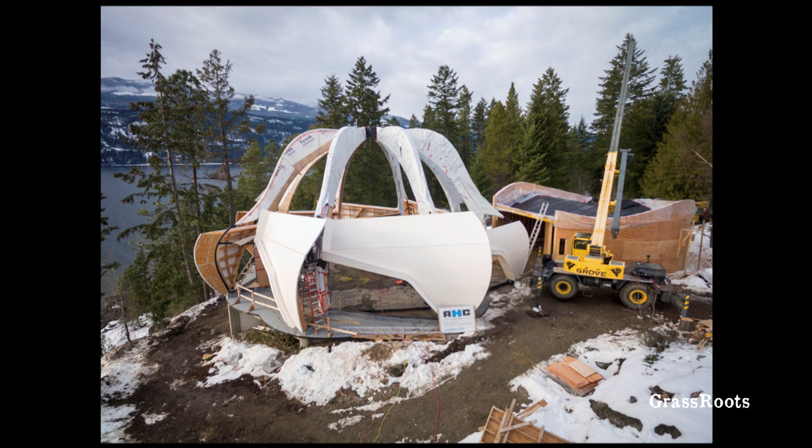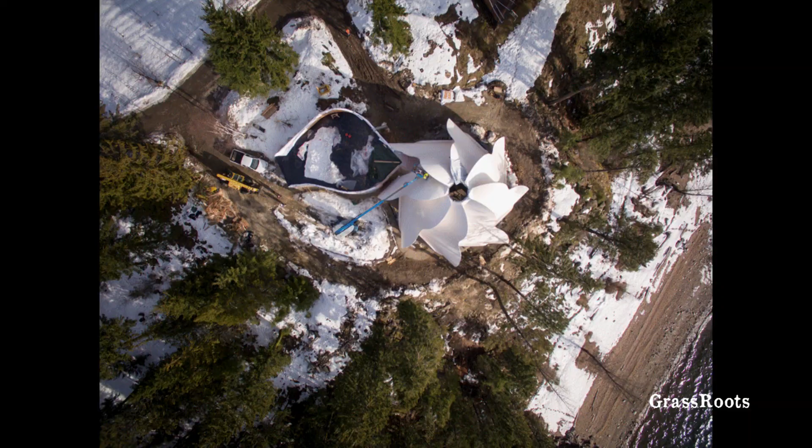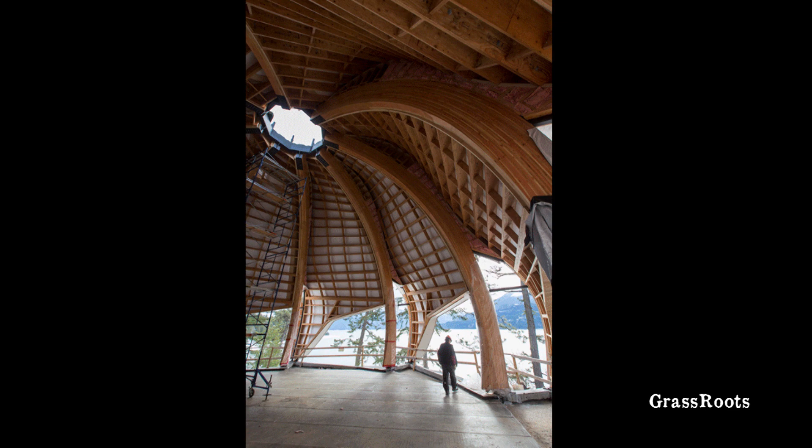Here the pieces are flying in. Keep going. And you can see these are all straight pieces of wood. And it's actually perverse because these members are not carrying gravity; the gravity is going that way. These are actually just there to cause the plywood diaphragm to behave the way we want it to behave. Keep on going. So, except for the primary beams, everything else is straight pieces of wood.